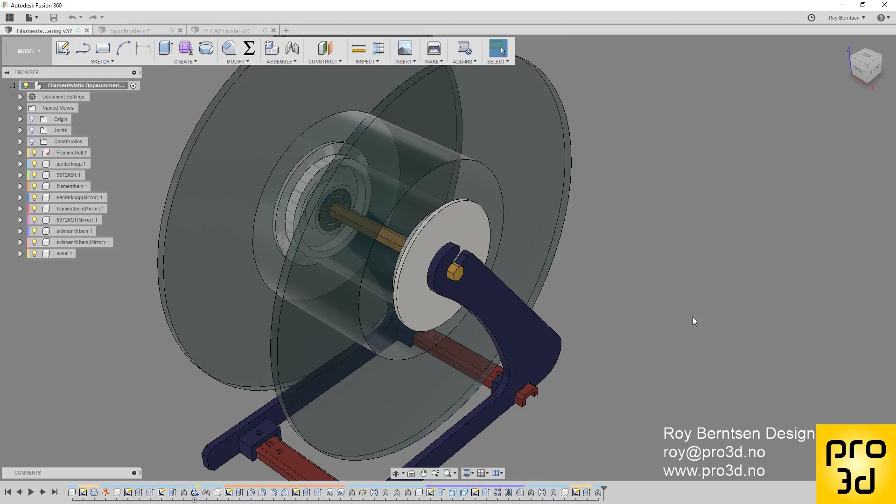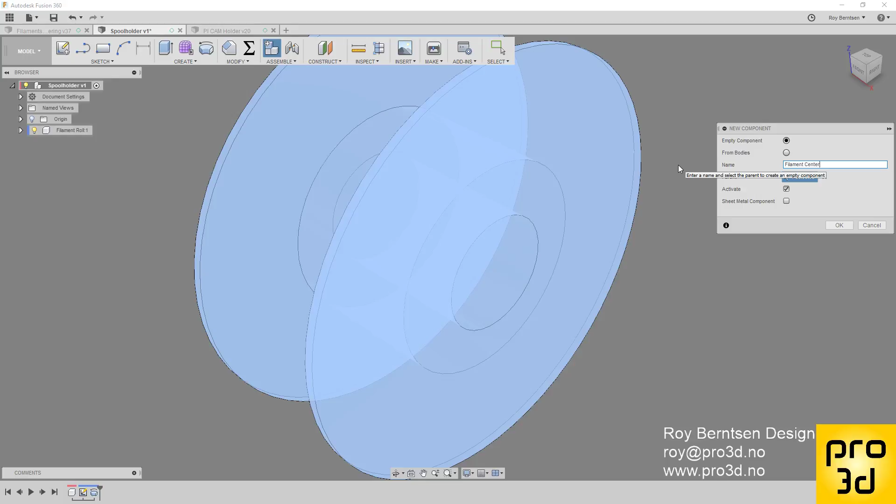Go back to our design, which should contain a filament roll now, and then we want to make a new component. Let's just call it filament center, or your choice. That should be activated by default when you create it, and just pick on the side of the roll and click create sketch and do a project of the roll and OK.

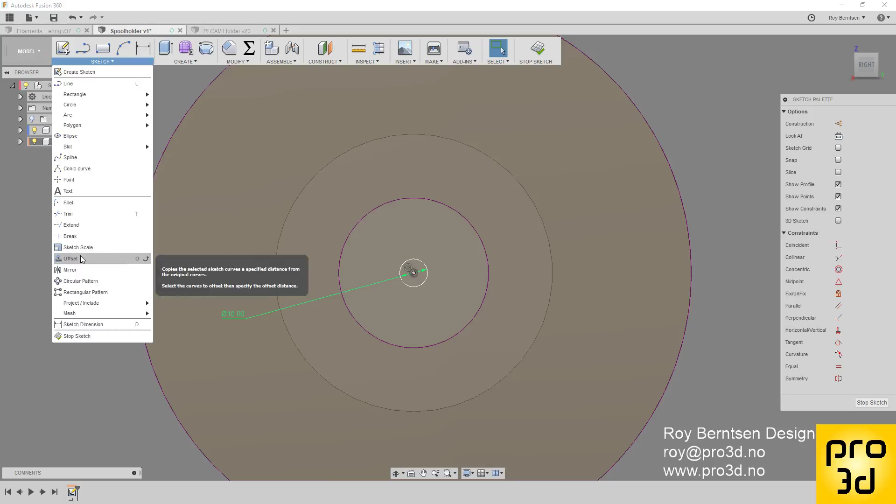Then we want to do a center circle, 10 millimeters, and then we want to do an offset of this guy. We want it inside 3 millimeters. That should be -3, and we can do one more offset.

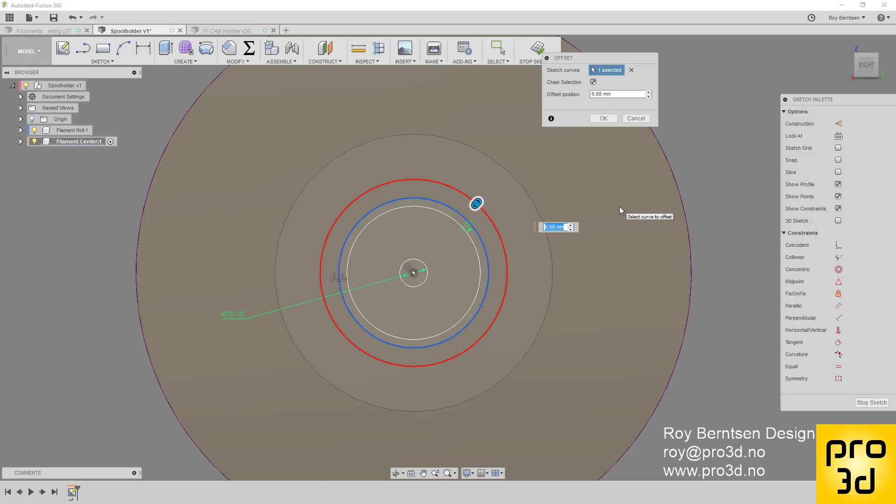You can also hit O on the keyboard. Let's do that 5 outside. Let's do it 6 outside, and then go to stop sketch.

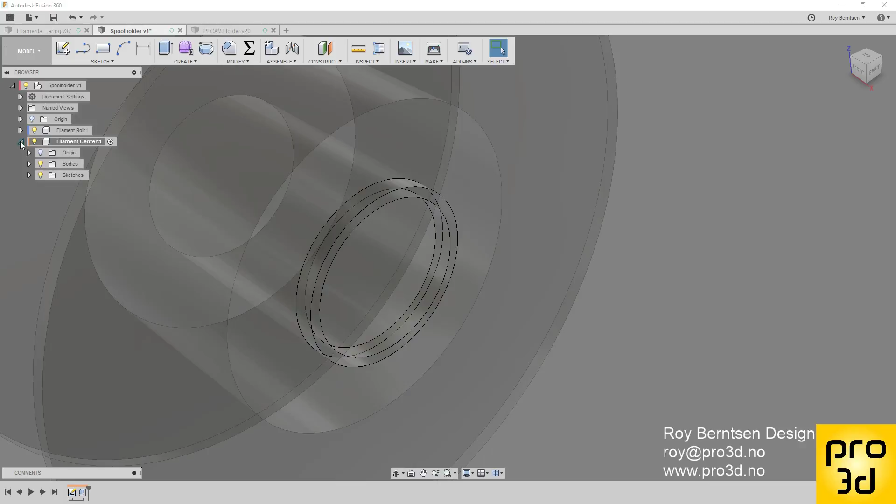We can start extruding this guy just inside the filament spool. Let's do it -6, I think should be fine.

And then get back to the sketch, turn it on again, and do another extrude. Pick all the profile except the center hole and do it 2, and should be join and OK.

Right click your center, go to appearance, pick some color, drag it on, and turn off the sketch.

Just have a look. There's your center, which is good. So that's the center. So this is step 2 in the filament spool holder design.